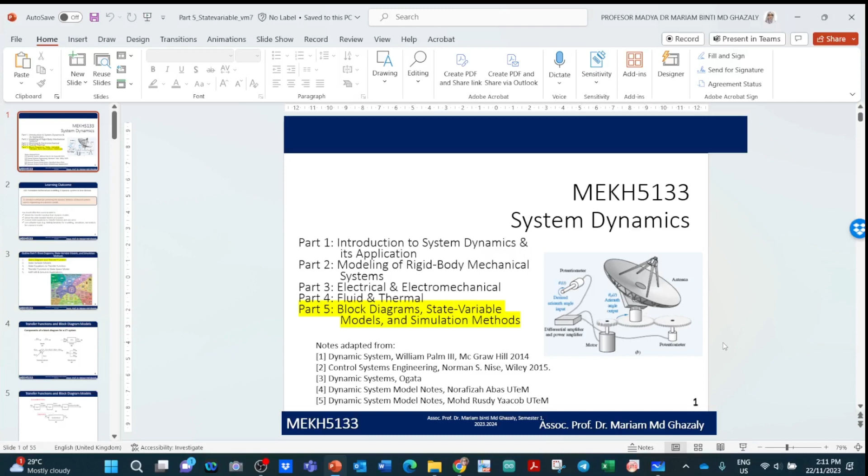Yesterday what we did was on the block diagram. I did a recap on the mechanical system, a bit on the mechanical system. I discussed the first order system, where we have one mass system and then a two mass system, and how you actually do the modeling. I did a recap on that for the first hour, and then recap also on electrical system. The reason why I did a recap is that both this modeling, mechanical and electrical system, will be used in part 5, which is state variable models, whereby you are going to derive the state variable based on the modeling you did in part 2 and 3.

Let me just sit there. I am a bit tired actually. So you just look at there.

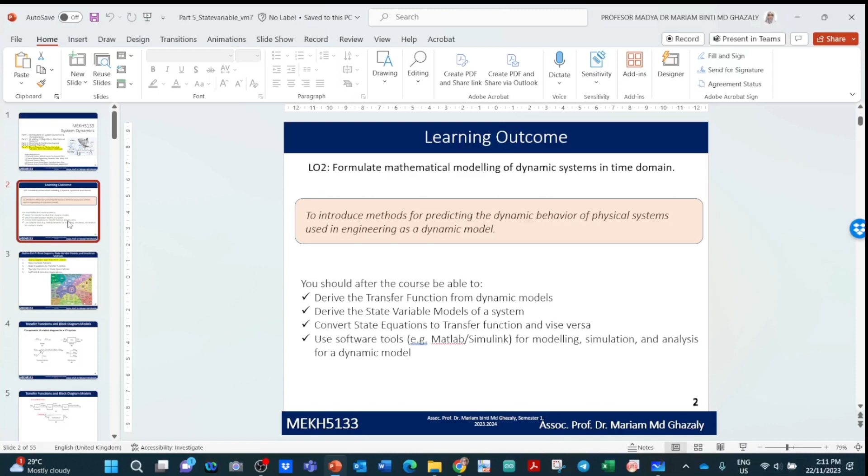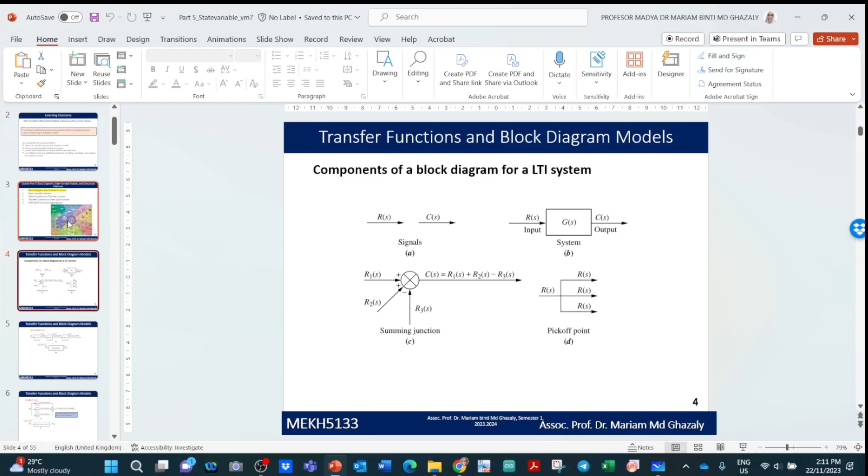So what we did was I recapped on what you learned before during your undergraduate bachelor degree. You have a transfer function, how you actually simplify it. You have a feedback, how you simplify it and get one transfer function. Basically you have a pick-off point and also moving it left or right. We did an example, the first example, to get the transfer function for the whole system based on input and output. And then this is an exercise that you take home, very simple actually, you have done it during undergraduate, so just a recap on that.

If you cannot remember, you can always go to YouTube and try to search for how to do the simplified block diagram, to study again, because I know some of the topics you may have learned during your second year or third year of undergraduate study, and you cannot recall how to do it. So you just go to YouTube and find related videos.

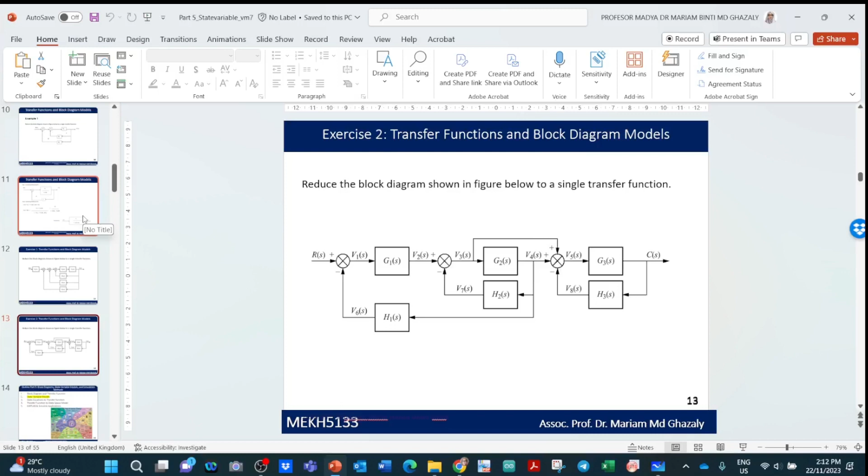And then we go to state variable models. So we did, I explained how we can actually define the state variable based on the input that we have. So we define, and for state space representation, I didn't bring the pointer.

So for the state space representation, we have two equations basically. We have the state equation, which is denoted by x dot, the derivative of state x. So x1 dot, x2 dot, and so on, depending on how many states you have. And then you have the output equation.

So the state equation will be depending on the input x, and also the x is the variable, and also on the input. And for the output equation, it will be depending on y itself, the output. Y will always depend on the input and the state that you derive.

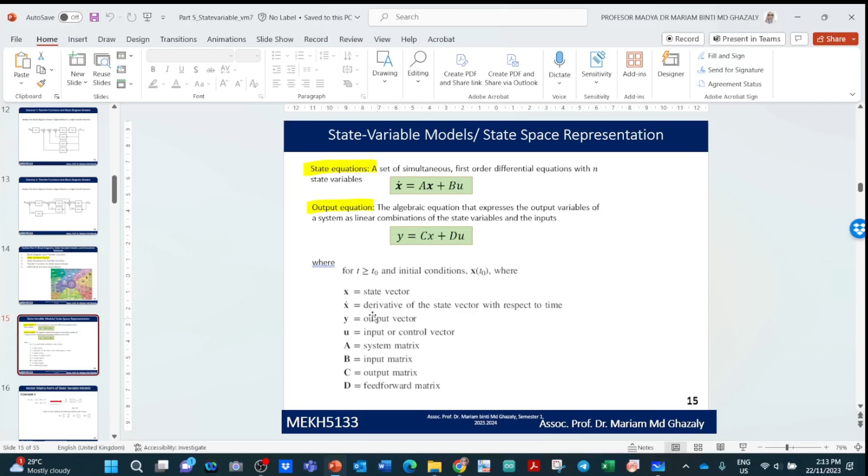Okay, so and then we did some examples. I think you can just go through, those who attended yesterday, no problem. I think it's still fresh in your mind.

But Sadam, you need to watch the video. Bear in mind, state variable, you have actually learned it during undergraduate also. So maybe a simpler block diagram.

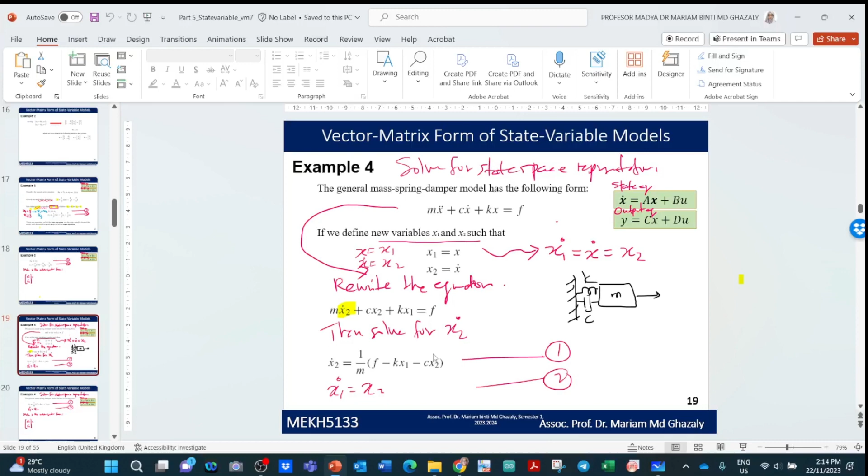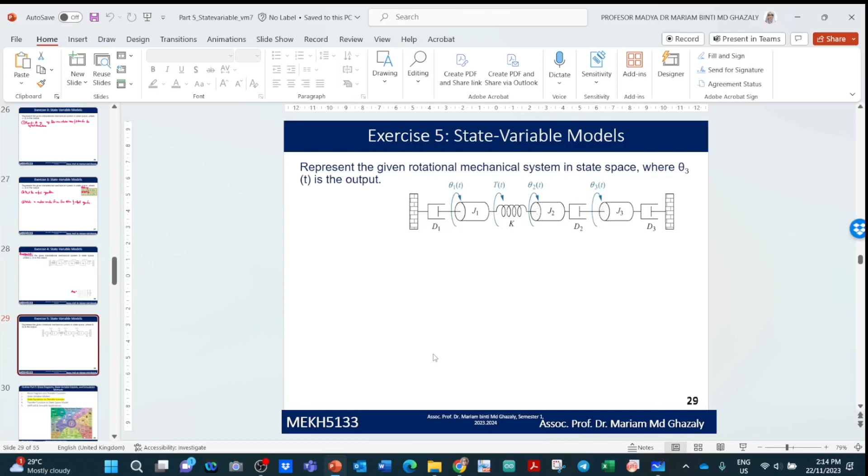Okay, so we actually stop at this one, this was take home, right? Do it on your own at home. I know we have the rotational mechanical system also. You do it as a take home exercise.

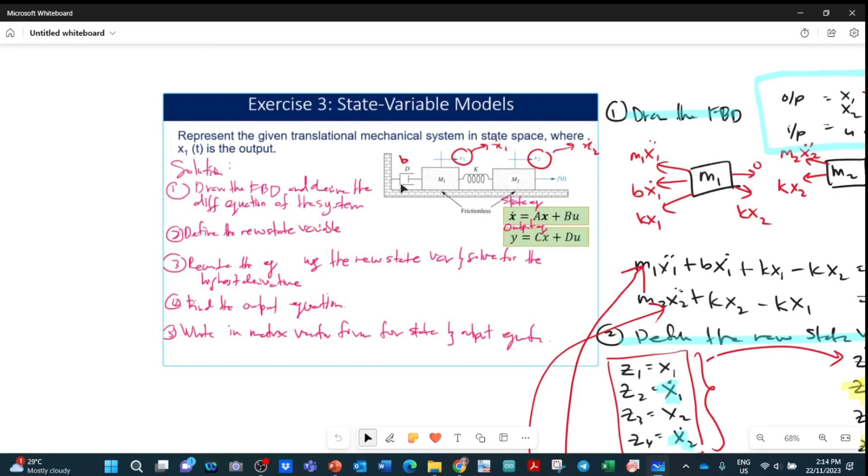So after you have defined the example state variable yesterday, let me just open back what we did yesterday. So we did exercise 3, state variable, we have a two mass system, and it's connected to a fixed wall. m1 is connected to a fixed wall, so it has a damping coefficient d, and then m1 is also connected to m2 with k value.

Then you have a force here, F is the input. Reason why, like I said, force is the input. So we have a system whereby, recap again if you cannot remember, because you just came in.

So yesterday I used a simple example. Luckily I had this teaching tool. It can be a string.

Okay, so let's say you have this one, and this is a mass. This is a one mass system, whereby this one is fixed, because it's fixed by my hand here.

So it's fixed by my hand here. So what you do is that when you pull this, what happens is that the mass will retract back to the original position. So when you push it, then it goes back. So we have a spring, of course, because it goes back.

What else do we have? We have the mass. So mass can be anything, mass can be different variable, for example the cylinder and so on. And for the case of this, we don't see any damping coefficient basically.

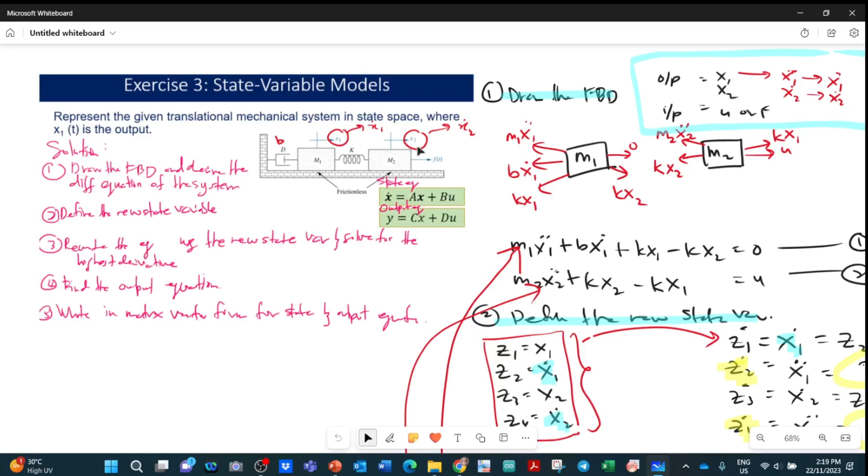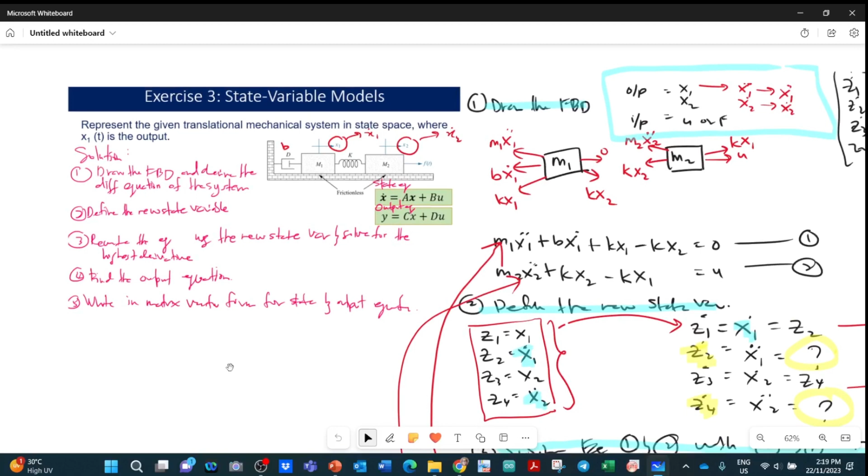Based on that, we want to come out with the free body diagram first. How we come up with the state variable model is we have this SOP, somehow, so that you understand how to do it step by step.

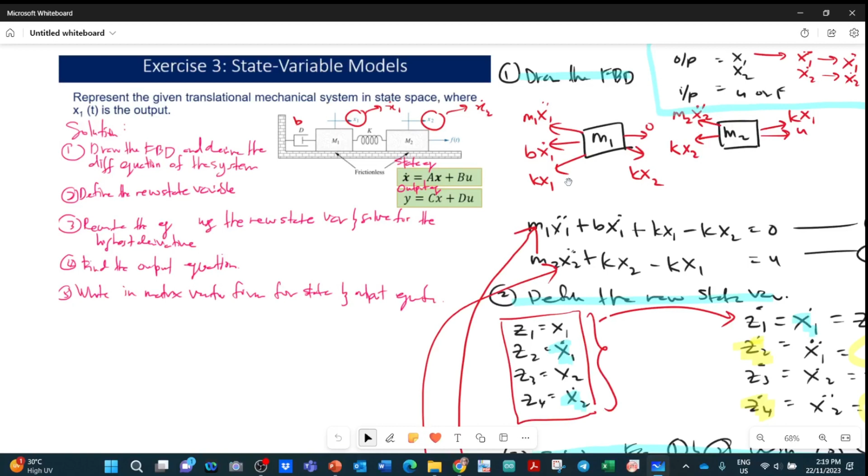So draw first the free body diagram of the system. Then you define a new variable based on what we have right now, based on the variable that we have. For the case of the variable that we have, we know that we have two displacements, x1 and x2. So we can just take that as two displacements. So we use x1 and x2 as the state variable.

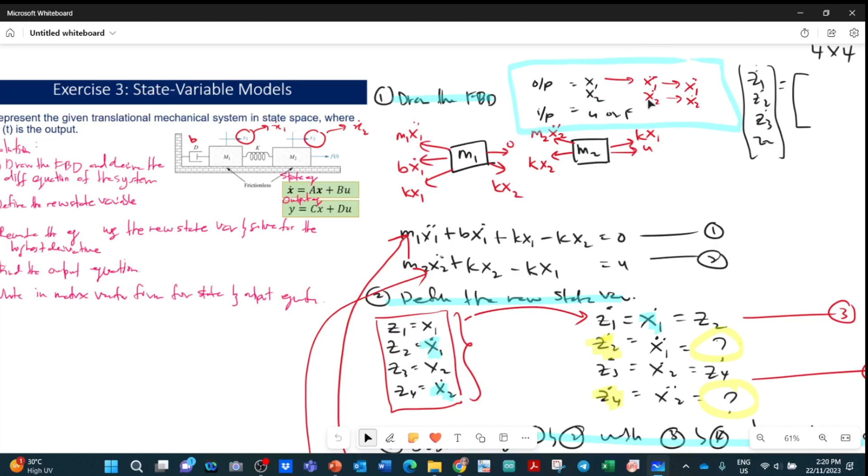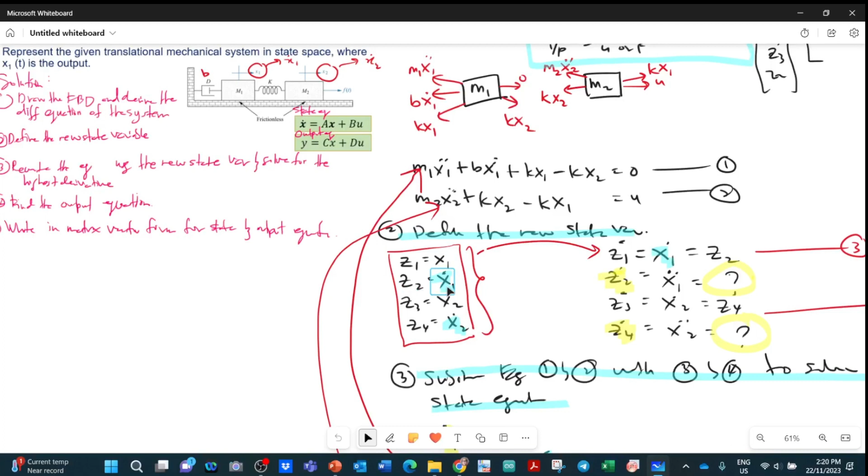We want to make it as the input. So for the second part, we define this new state variable. We define z1 equal to x1, z2 equal to x1 dot, and z3 equal to x2, and so on.

But like I said, there's no one solution for this. I mentioned yesterday, sometimes you might want to define it as z1 equal to x1 - this is normal, we start with 1, 2, and so on. But then when we define z2, maybe you start with x2. So this is another option of how you define the state variable.

So there is no fixed answer for when you define it. It's up to you how you define it. So when we do this, then z3 will be x1 dot and z4 will be x2 dot.

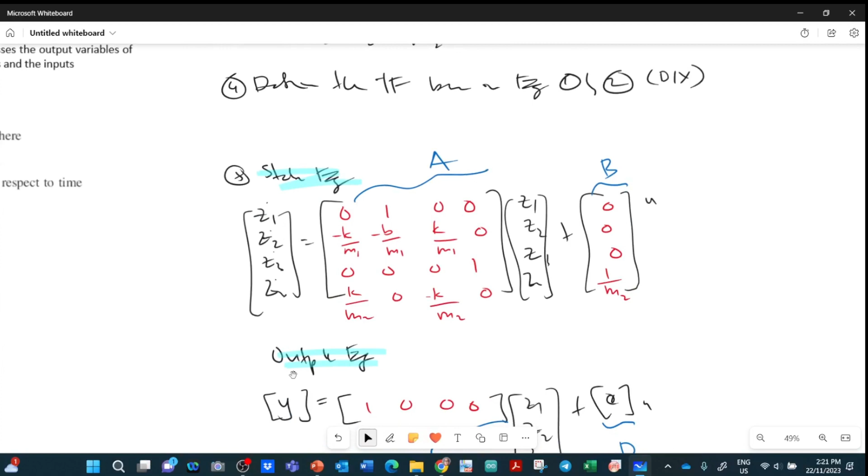So when we have this another set of state variables that we assign, this will be a different value, and your answer will be a bit different. The state equation and output equation will not be the same like this - it will depend on the variable that you defined earlier.

So when you do your tutorial, I have a set of tutorials that I uploaded in YouLearn, under part in YouLearn. Let me just show you.

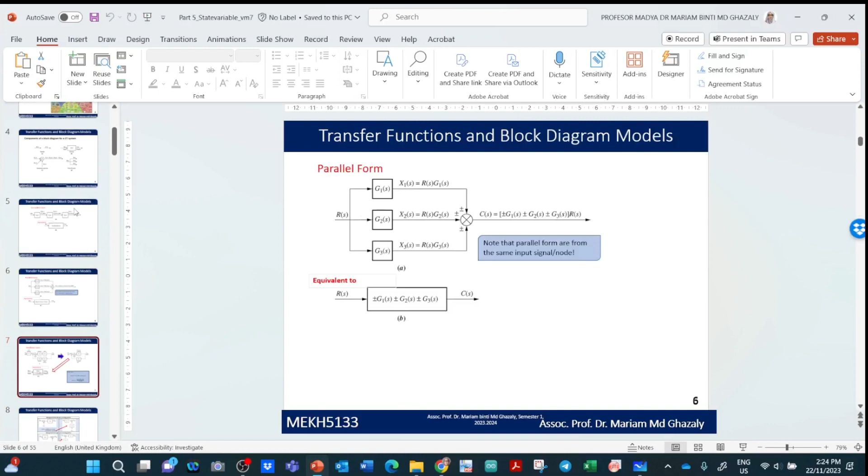So now, what we are going to do is learn how to convert from state variable or state equation to transfer function.

And of course yesterday, you also came up with what I taught you guys - let me check yesterday's transfer function.

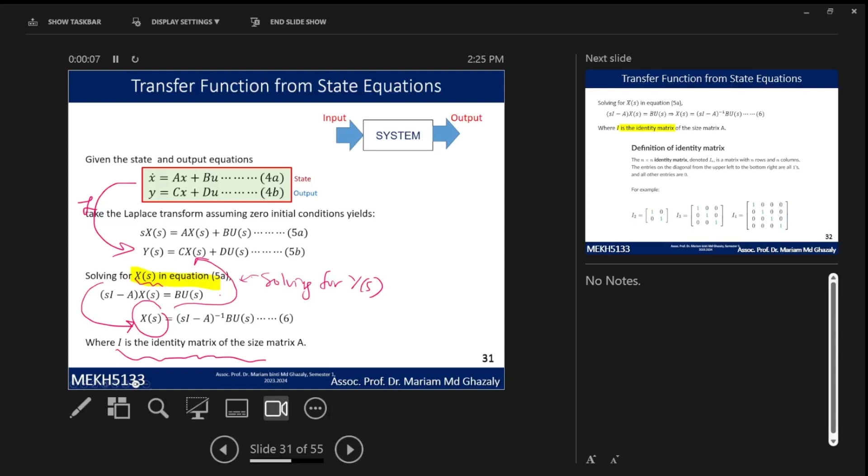So what we are going to do is convert this from state equation to Laplace. So how do you come up with this equation? Let me just derive it. Of course, you can memorize it if you want, but as an engineer, you want to know where it comes from, right?

Most of the time, where does the equation come from? It's like a simple question by my student. Last semester I taught signal system, and I was teaching Fourier series or Fourier transform, and even Z transform. We have the table to refer to when doing conversions, but before I teach them to use the table, I will always derive first and prove that this is the same as the table. Then there was one question by a student: why do we need to derive everything when we can use the table to get the answer?

Well, it's the same reason why you use a calculator. A calculator is a tool, right? So the table for Z transform, Fourier transform is a tool that's very fast for you to get the answer.

But if you don't learn the basics, for example the basics of multiplication, 12 times 12, and you just press it on a calculator and get 144 — is this correct or not? How do you know it's correct if you don't know the background of how to do the calculation?

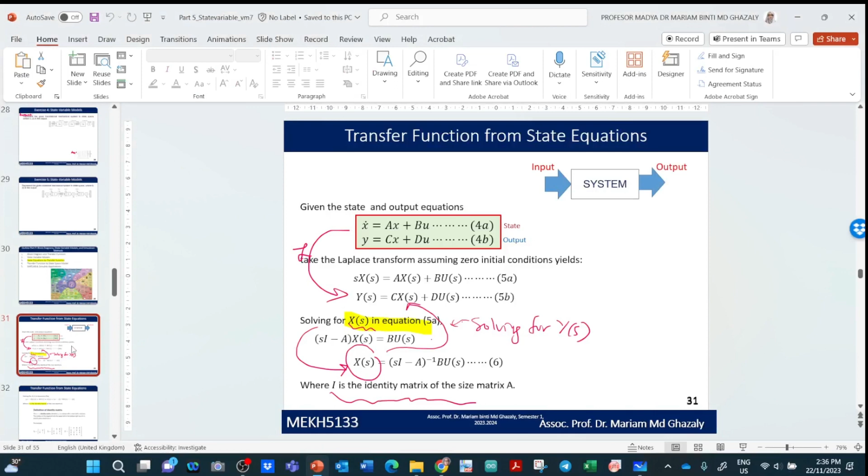So this is just a bit of explanation of the identity matrix just now. So identity matrix meaning that if you have a 2 by 2 matrix,

so this is 2 by 2, meaning that instead of 0 everything, you have an identity matrix like this. And this will be 3 by 3, whereby you have 1 in the center there, and then this will be 4 by 4. Right? So this will be fixed when you have a 3 by 3, 2 by 2, or 4 by 4 matrix.

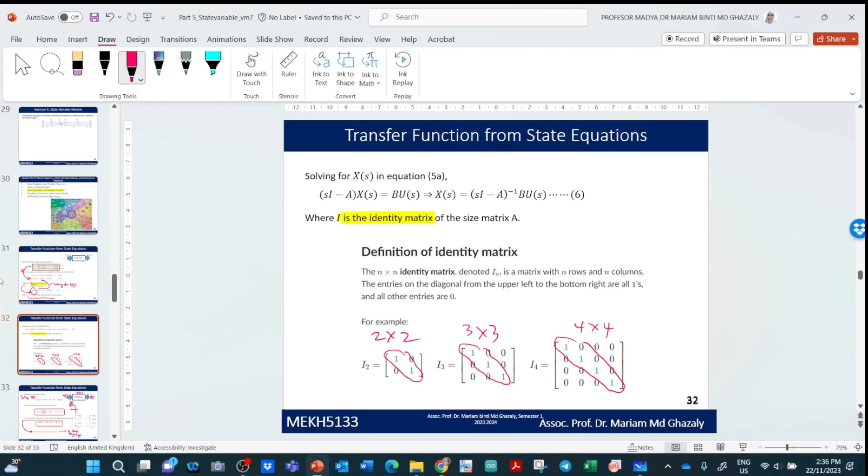So let's look at a system whereby this one is, okay, this is just a little explanation about why you want to use the equation. So most of the time, if you remember during your undergraduate bachelor degree, you actually calculate the characteristic equation. So how to do that is by calculating the determinant SI minus A. Can you still remember how to do that? 2 by 2.

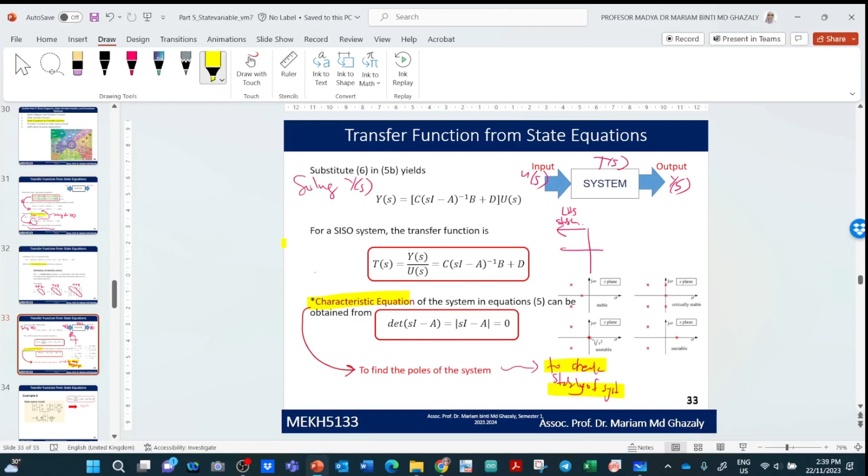So bear in mind that when he gives you a transfer function, meaning that it's already derived from a system, maybe the question will be asked like, find the stability of the system when blah blah blah and so on. So how to get the poles value, when you want to reach this performance characteristic.

So let's look at an example. We take this one example whereby we have a state space model, 2x2 matrix. So we have A, B, C, and D. Find TS - TS is basically the output over input. So you can find it using what we have just now. We derive it, so let's do this together.

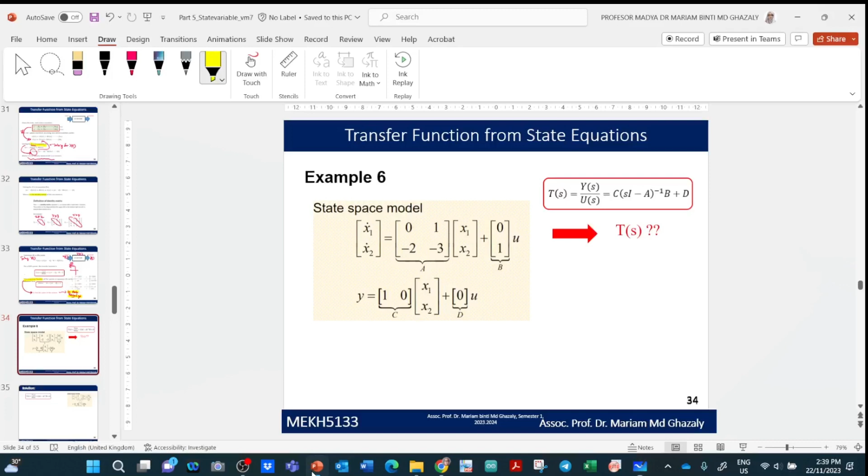I hope everybody has pen and paper. In the notes, do we have the answer? Oh, we have the answer. But anyway, just don't look at that yet. We do it together in front.

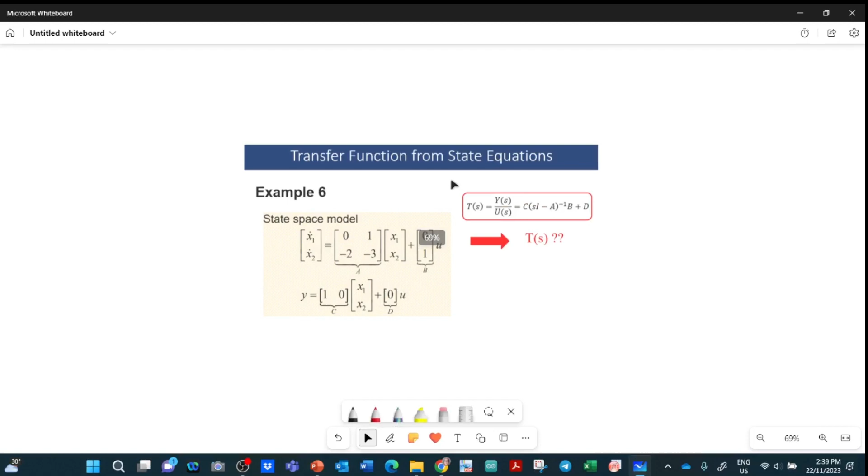So what we need to do first is, let's say this is continuing from what we did yesterday. You are given one system, one mass system, and from this one mass system you get a 2x2 matrix. After you define the variables and so on, you get this state space model. So the state space model will consist of this first equation, we call it the state equation, and then we have the output equation.

So what we want to do is, first of all, when the question is find the TS, or TS is actually G. So you have the TS here, you have the input U, and then you have output as Y.

So basically find the transfer function of the system. So the first step is to take out the values that you have, and directly key them into this equation. Let's say I'm going to denote it as GS. So GS equivalent to C, SI minus A inverse, multiplied by B, plus D.

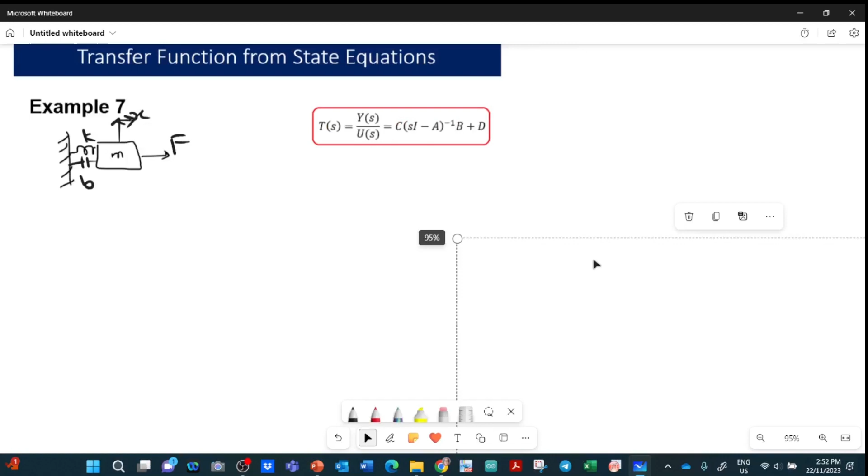This value, okay, so let's say we take this value whereby you define it from this equation. Okay, so after doing yesterday's exercise, you get the state representation, meaning the state equation and also the output equation. But in the question, they ask you to find the transfer function of the system. Of course, you can actually get the transfer function without doing the state representation, like I said yesterday.

But right now we already have the state representation. So for example, a complex system, maybe they give you a state representation - a complex one, 4x4 matrix - so calculate the transfer function. What you can do is use the equation, the equation as in the example just now, just check.

In the previous example, they gave you a value, so we cannot really use that. So let's do it from the solution using this equation. We want to find G(s).

C times (sI minus A) inverse times B plus D. For D, you don't have any value. You have A, B, C, and D here. So let's do this quickly.

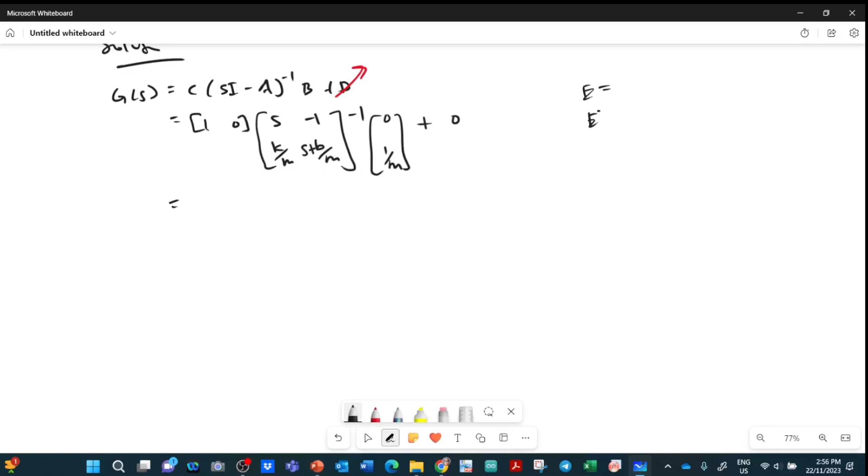Let's do this. I'll give you 1 minute to get the determinant and the inverse of this matrix. Try using, just now we have E, right? And then try to use minus 1, the inverse of that. So the equation for that.

Why do most normal books and textbooks leave the values for K, B like this? They don't give you a value. The reason is that when you leave K, B, and M as variables, they can be varied. You might want to look at increasing a mass value, so you can actually tweak the value from here. If you are given the value directly, it's impossible to change it later on. So you keep the function in general like this, and later when you do the analysis, you can change the parameter K to a different value and so on. That's why it looks a bit complicated, leaving it in these terms, but it's very useful later when you do analysis.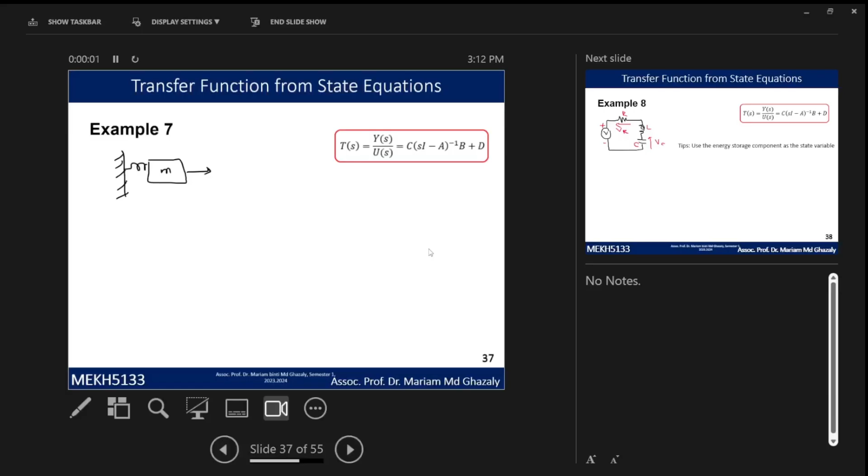So of course in MATLAB, if you don't have a value like this, you have only value, right? 0, 1, minus 2, 3. So you can change it with a variable b, m, and minus k. And then you can still get the transfer function. That will be the first example just now, example 7.

So let's look at one example whereby we have a circuit, because yesterday we didn't cover any circuit yet. So today we will cover a circuit, a one loop circuit. So let's do this.

Okay, so before we can actually get the transfer function from the state equation, we don't have yet a state equation, because yesterday we didn't cover circuits yet. So the first step for today will be to actually derive the equation from the circuit - derive the differential equation of the system.

So like I said, before we can proceed, we need to find out how many states that you are going to derive, because later we are going to make it into states. Is it one state, x1, x2, or so on? So how can you actually, for a circuit, there's a tip on how to define the state variable.

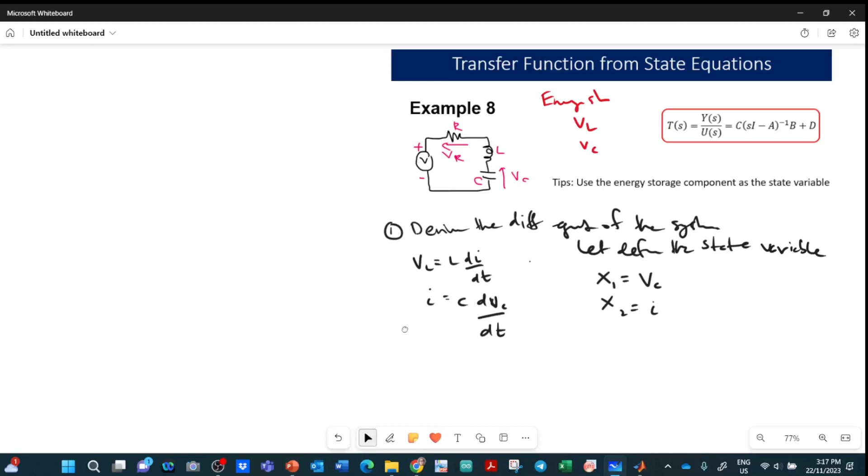So if you see here, you have I, which is related to VC, and also I is related to VL. So we are going to derive it as the state variable, easy for you later to come up with the state variable. So from here we get x1 dot. x1 dot equivalent to VC dot.

And then we have x2 dot equivalent to I dot. Just follow me first. So VC dot, if you want to write it in terms of the time domain, you have dVC over dt, right? Which is equivalent to this value, dVC over dt. And then you have I dot will be this one.

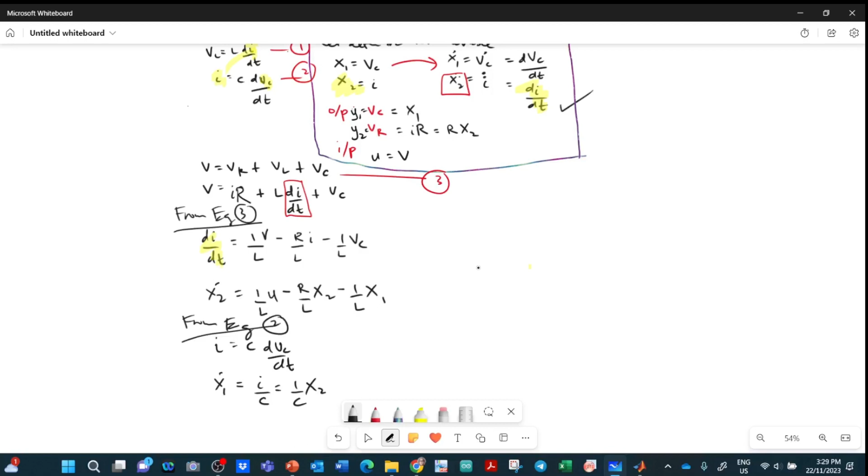Basically, compared to what you learned yesterday, this is kind of easier than today, because today, due to the equation itself, we have two different energy storage systems whereby we have L and C. So when you derive it, you will see that, oh, you have x1 dot, but this one is not a complete equation yet.

So that's why you need to derive it from this equation. Also for x2 dot, you see that you have di over dt, and this is referring to equation number 1, right? However, this is connected to VL. VL equal to L di over dt. So VL is where? VL is based on this third equation. Then when you substitute everything, you can actually find what is di over dt.

So maybe my style of explaining goes over here and then goes back and so on. So maybe you can come up with your own SOP, how you can get the best way to actually derive it. But in the end, you will get one answer, which is these two equations.

So what you want to do next is just substitute into the state variable equation. State equation, you have x1 dot, x2 dot, so you have x1, x2, plus input. So let's look at x1 dot, where is it? Here. So you only have 1 over C, x2. So x1 is 0, 1 over C. No input. For x2, it's this equation. You will see that, oh, I have 1 over L for the input.

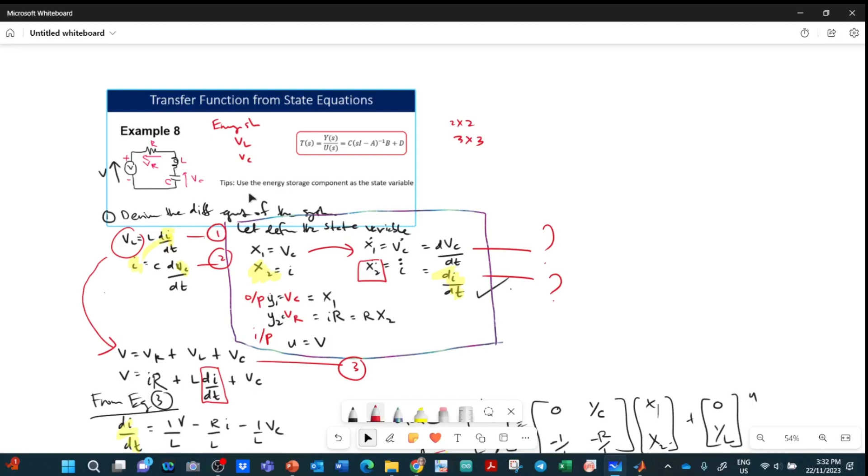That means you have VC and VR as the output. In a question, most of the time they will state which output you want to derive. So we have already defined the output just now. We defined that we have two outputs. Y1 is equal to VC, which is equivalent to X1. And Y2 is the voltage across R, equivalent to IR, so we have Rx2.

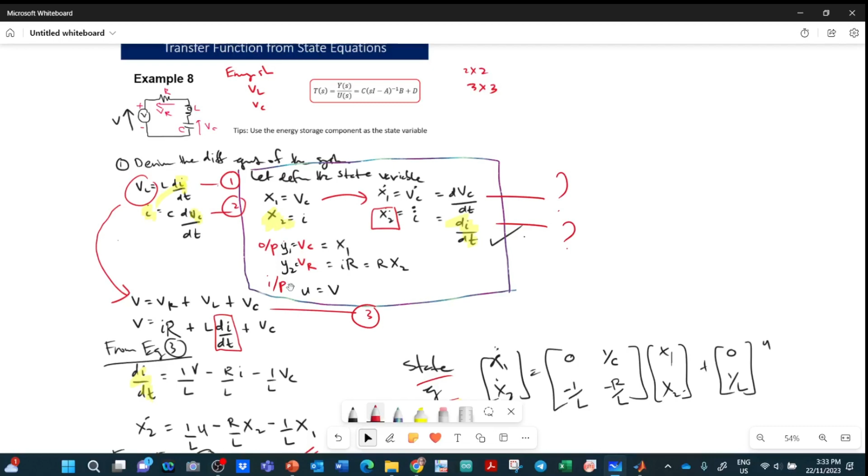Of course, if I want to make this more complicated, I could have three outputs, whereby I have another output across L inductance. So based on that, you have Y3, another one. So your state variable output equation will not be a 1 times 2 matrix, but 1 times 3. So let's write Y1 and Y2 equivalent to, look at your equation. Your equation, you have here. Equation equivalent to, where is the equation, 0, y1 equal to x1, so x1, x2, 1 and 0, right? There's no input, so 0.

Y2 is equivalent to Rx2. So we have 0 and R. Right? So this one will represent the system as a state variable form.

Is that right? Hello?

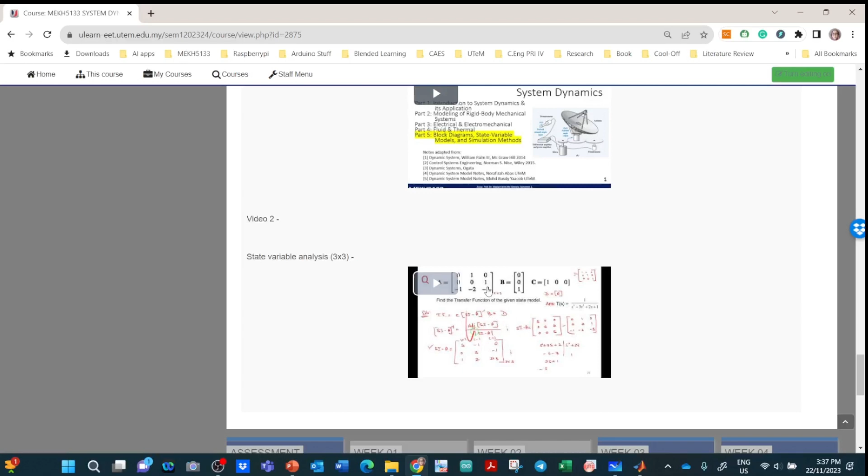This equation. Right. So and then there's another example, exercise 6, whereby I give you an example of a 3 by 3 matrix. Okay, so in ULearn, I have shared to you, okay, because we don't have time, actually I need to stop at 4. So in the ULearn, under part 5, okay, I have linked you to one example of how to do a 3 by 3 matrix calculation. So they explain how to do a calculation.

So if you cannot remember, just refer to this video and try to get the answer. Okay, for this, the answer is given down here. Okay, 1 over s cubed plus 3s squared plus 2s plus 1. So you can also verify this using MATLAB.

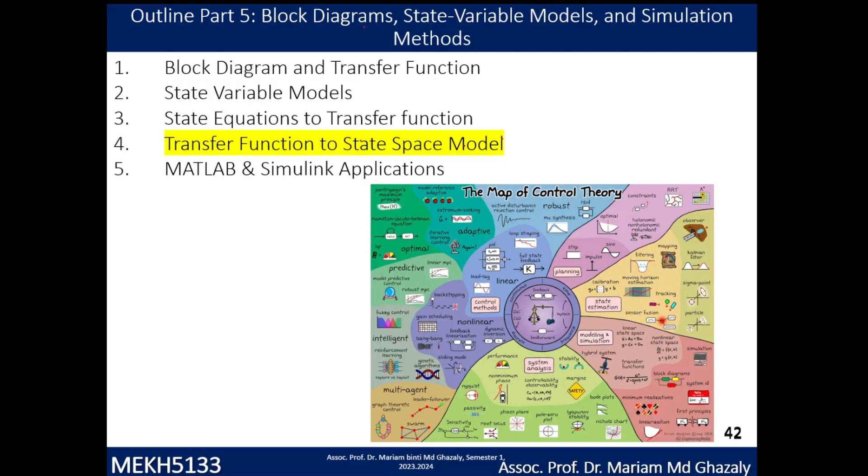So what we are learning is actually interchanging between when you have a transfer function, how to get from the state space equation. Okay, example in chapter 2, you do a modeling, you get the transfer function. So can you easily get the state space model A, B, C, and D from the transfer function? Yes, you can. Okay, so let's do this example.

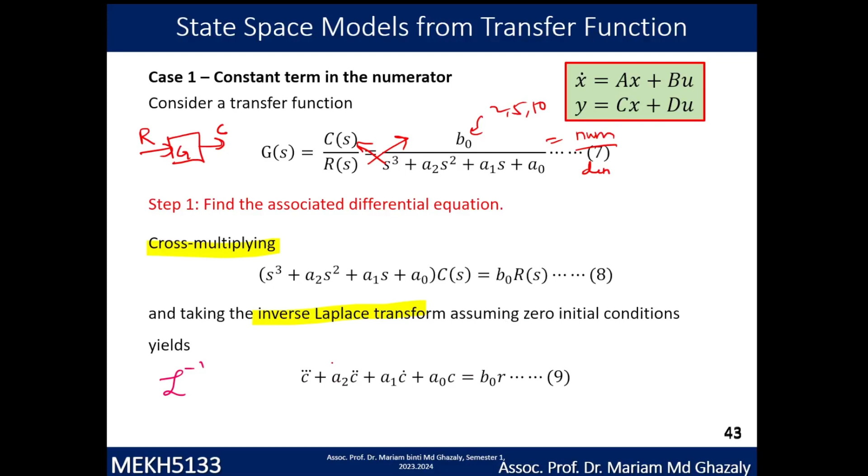Then you're going to select the state variable. This is what you actually did last time, right? So how you can select the state variable is by assuming that we have the third order system, x triple dot. Most of the time, if you have x double dot, you are going to have up to a 3 by 3 matrix, minus that one. So we are going to assume that we use, for example, the state variable x1 until x3.

Not a good explanation. Let me just write it out.

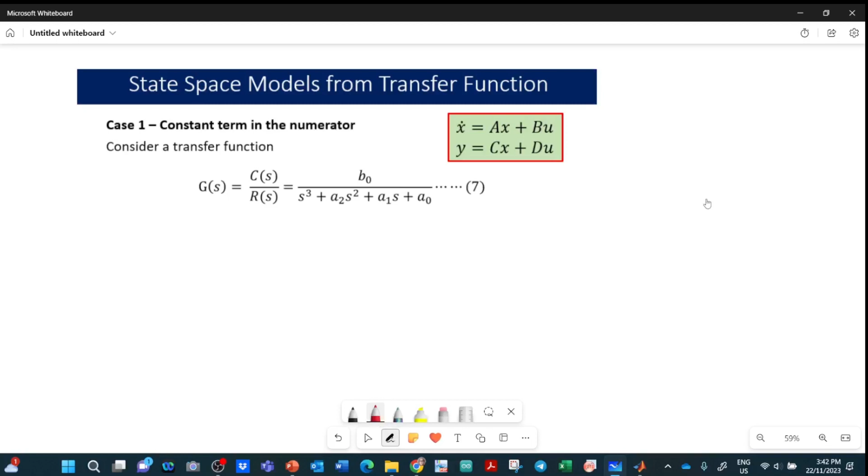What we did first is cross multiply. So you have C(S) multiplied by S cubed plus A2 S squared plus A1 S plus A0, equivalent to B0 R(S). Then you use the inverse transform, you get C triple dot, plus A2 C double dot, plus A1 C dot, plus A0 equal to B0 R.

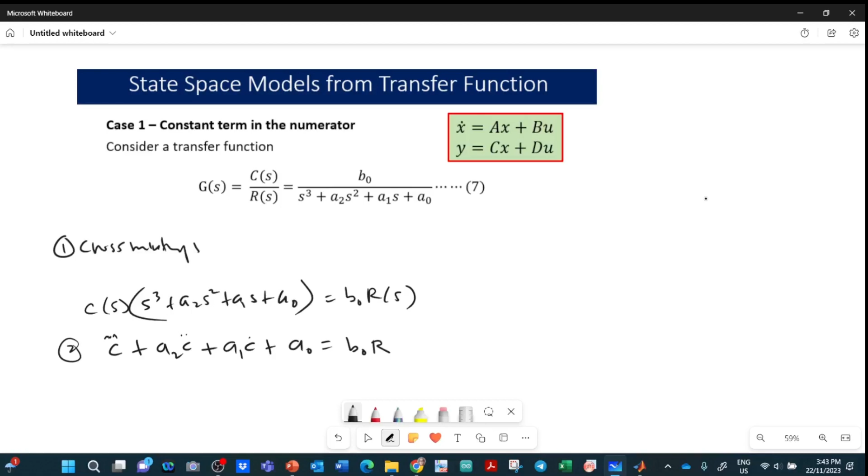So when you have this example, what you do is define the state variable.

So define the state variable. Let's say we define it by x1 equal to C, x2 equal to C dot, x3 equal to C double dot. So we want to get the state variable in terms of the derivative of x1 until x3. So you have x1 dot equal to C dot, which is equal to...

What's the variable? C dot and C double dot. So C dot is equal to x2, x1 dot equal to C... x2 here equal to C dot, C double dot which is equal to x3, x3 dot, which is C triple dot. Okay, so once we define that, number 3 is to define it.

Number two just now was to inverse the Laplace. So you just refer to here in the slide, slide 2, select the state variable. So you select the state variable, and then what you're going to do, like in the example before, is substitute this state variable into this equation.

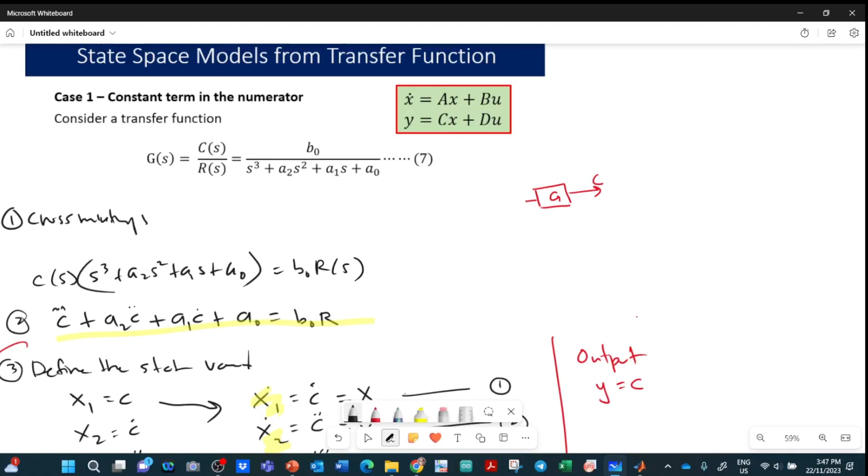And then you have R, then output is C. So C is what? C equivalent to, we have C here, X1. So X1, this is output. How about input? Input is R, so input U equal to R. So actually this B naught R, you change it with U.

So now you have completed the third equation. So we represent it in the state equation and output equation. State equation x1 dot, x2 dot, x3 dot. What do you get? X1 dot, where is it? X2. So x1 dot is here. So you have x1, x2, x3...

plus the input U. So x1 equal to x2, so you have 0, 1, 0. No input. X2 dot is equal to x3, so 0, 0, 1, 0. X3 dot is equal to C triple dot. Do you get the answer? Yes, we get the answer over here, right?

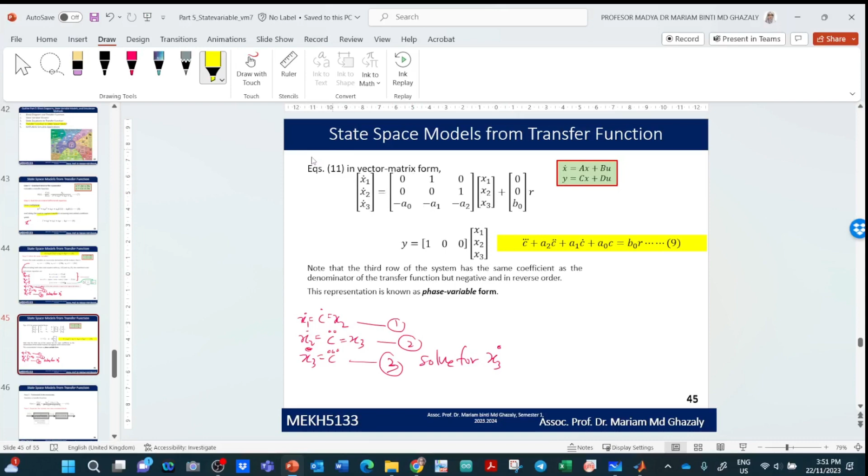Alright, so let's look at the answer. Is it correct? It's correct, eh? Let me just take that answer.

Okay, this is the answer. Right? So almost finished. Right now you only have the state equation. Okay, you haven't write out the output equation. So y equivalent to, where's the output equation? Over here, you have x1, x2, x3 plus 0.

Okay, so output is x1 only. Okay, so 1, 0, 0. Done. Okay, so what we did was to actually confirm that the answer is correct, no?

With the, well, actually this one is just the theory behind it, but I tried to solve it for you guys, so that it's easier for you to understand why we actually come up with that answer. Okay, so this will be another example whereby if the numerator is not a constant value, okay, you have in terms of second order system on top of here.

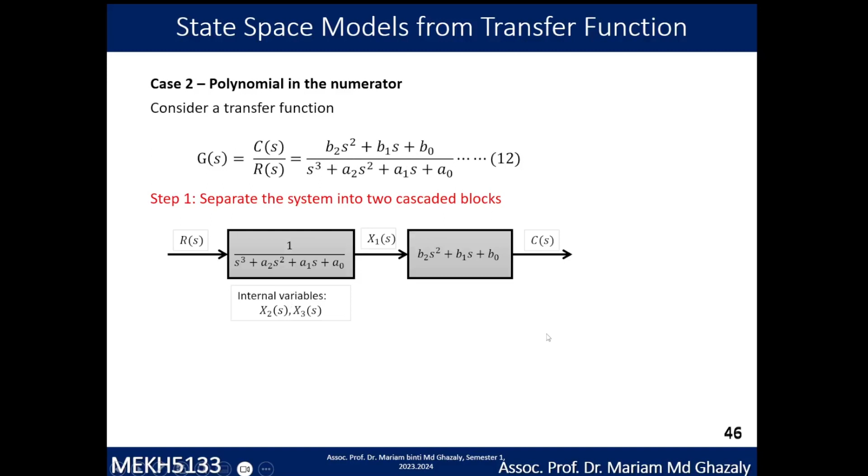So if you learn about signal flow graph, you can actually split the signal into two, right? So you have the first equation with the denominator, and then you have the second for the numerator. Okay, so if you have that, the state equation will be the same. Okay, but the output equation will have 3 outputs, and you can come up with this y equal to b naught, b1, b2 over the x1, x2, x3 state.

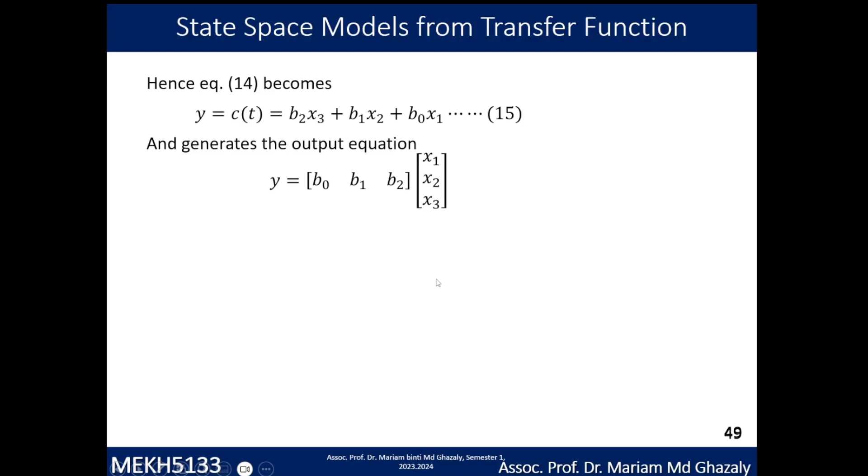Okay, so try to do it at home. I think this is simple. Try to denote it, okay, using the same variable. Okay, this one is one example because we don't have time. Okay, and I give you the answer down there. So verify what is it.

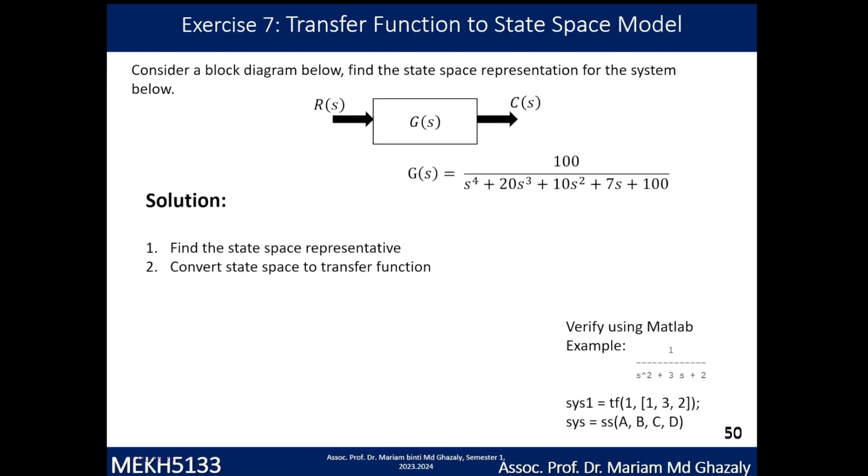Okay, so you can verify this answer whereby, okay, you find the state representation using the same method just now. After you get A, B, C, D, using MATLAB confirm that the answer is correct. You can get the transfer function. So if you get the transfer function, it's correct. Okay, we don't have time, so you can do this on your own, a very simple exercise.

Okay, so as assignment 2, okay, what you're going to do is that you're given this equation. So I'm referring to the textbook.

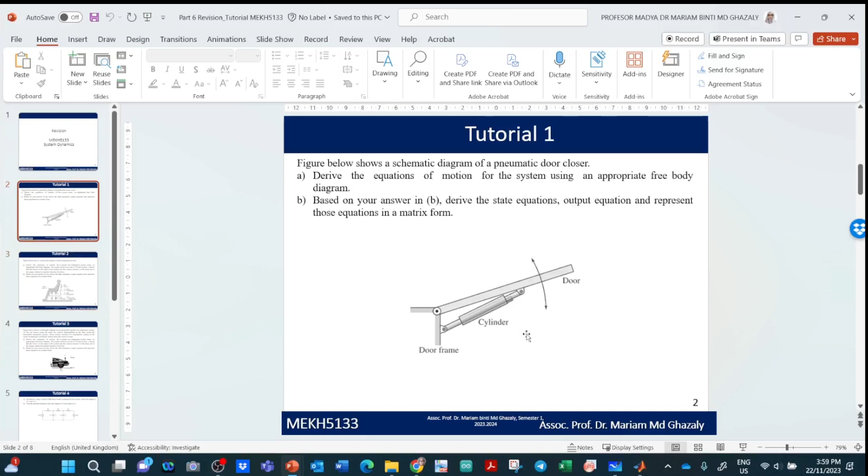For level master, the moderator said that you cannot give students the block diagram. Student need to come up with their own block diagram based on their understanding. Okay, so example like this one, the door. How do you do the modeling?

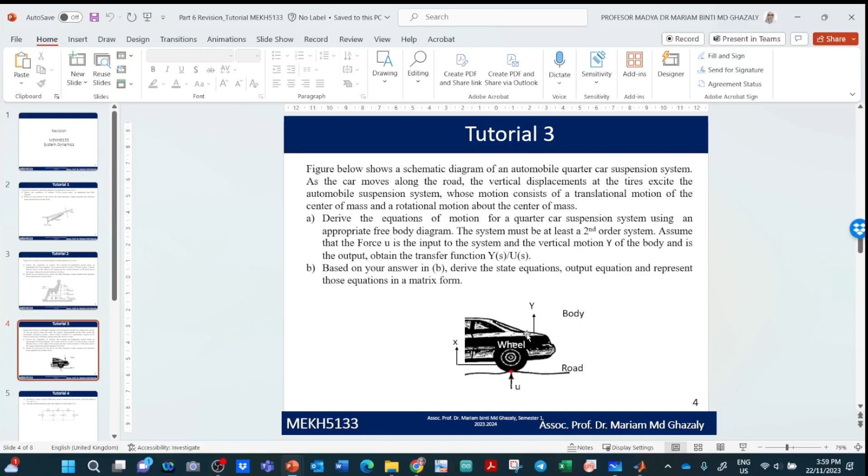For the chair, okay, the seat with the damping coefficient, for quarter car suspension system. This one I think it has been used in the class, part 2, I have used most of it. Quarter car suspension system. And then we have tutorial 4, 5, 6 which is on circuit.

Another example like this, how many can you see? 3. You have inductance, you have 2 capacitors, so you will have a 3x3 matrix. Same goes to this one, so you have 3, so it's going to be a 3x3 matrix.

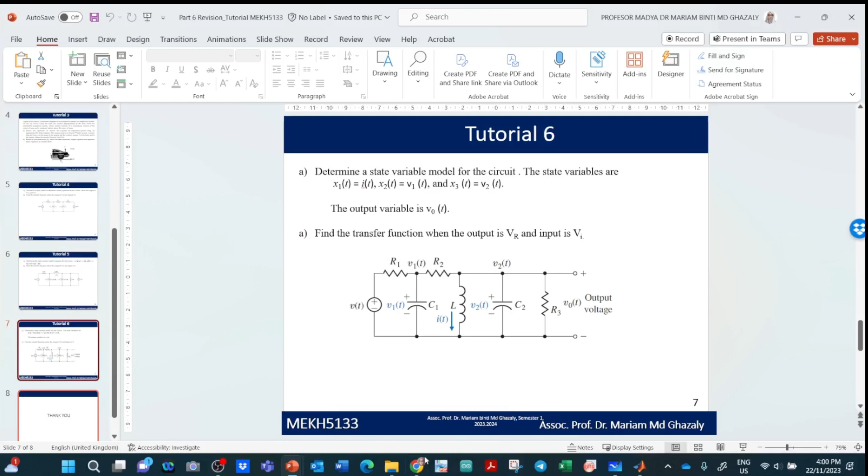Make sure that you go to ULearn and view how to do the 3x3 matrix. Maybe in the exam we come out with a 3x3 matrix. What's exam? We cannot give you an easy example exercise. 2x2 is kind of easy, so it might go up to maximum 3x3 only. 4x4 is impossible for you to answer within the hour.